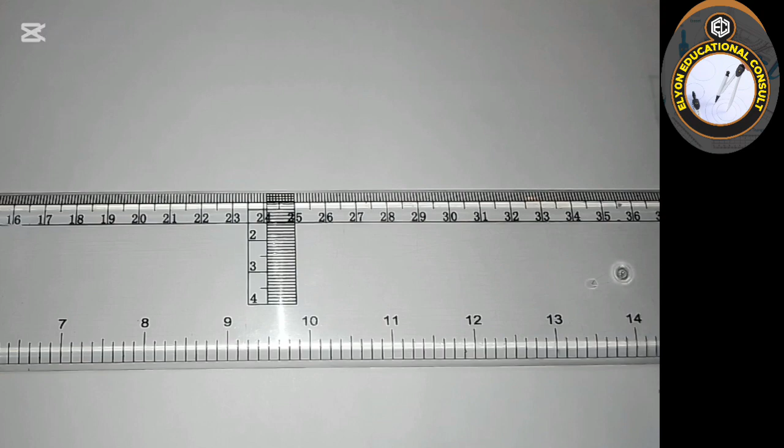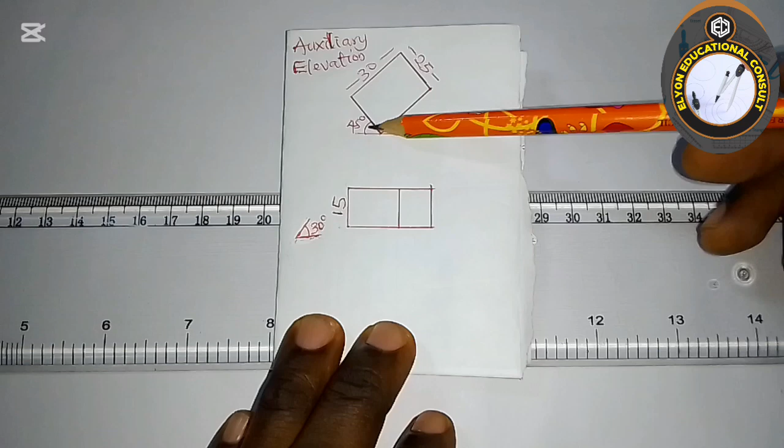In this video, we are going to be learning how to construct an auxiliary elevation of a rectangular solid block inclined at an angle. Okay, this is the rectangular solid block. You can see it is inclined at an angle. We are going to be drawing the rectangular solid block at an inclined angle of 45 degrees, and this is the plan.

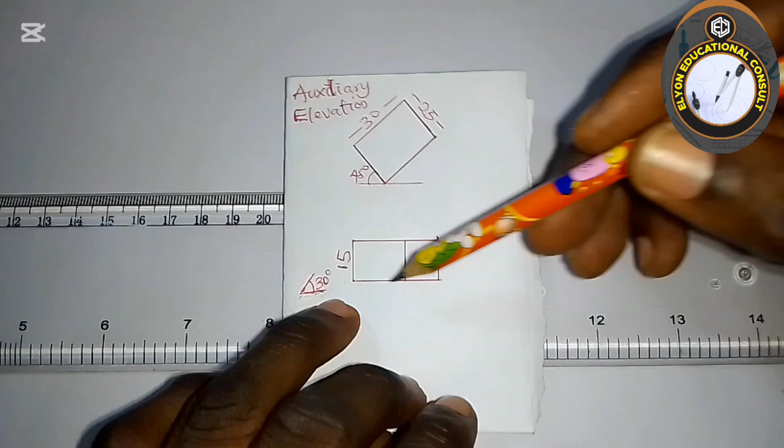You can see the angle of projection placed here. This alone tells us that we are to draw the auxiliary elevation, because we are going to be projecting from each of the edges of the plan. The first thing we have to deal with is drawing the given view, which is very easy to draw. So I will start straight away: I will draw the elevation, then I can project down. So this is what I'm going to do now.

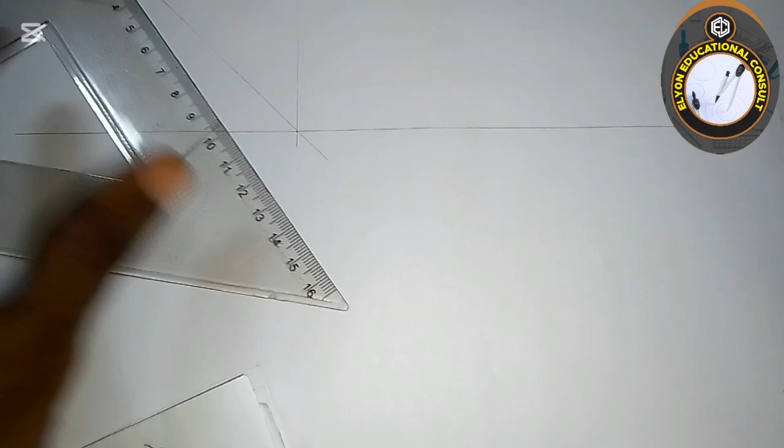From here, now I will draw this. Then I will use my 45 degree set square at any point of choice. If I use this point, or better still, I can draw a small perpendicular line. From that point, just draw the perpendicular up that way, then we project at 45 degrees this way. I'm using the inner side of my set square as my reference point. Then come this to the other side this way.

We have this. I will take the length here. We are given it to be 25, 2.5 on the centimeter rule. Then we have this. Next thing, let me draw out this place first. We are given this side to be 30.

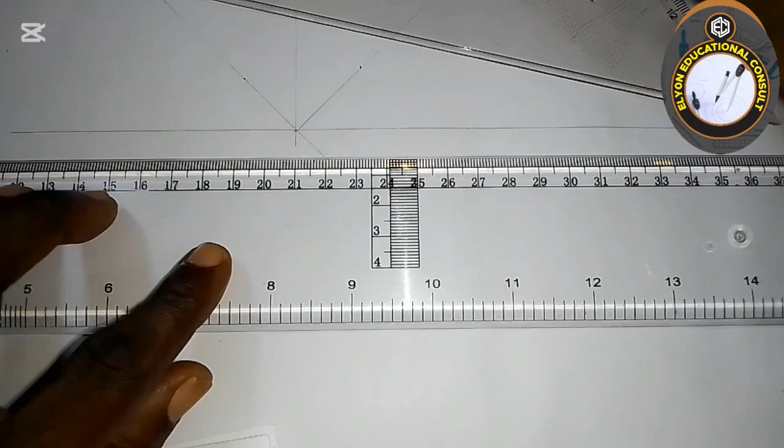Alright, then we can have this side drawn out. This side too is 45, so adjust to this part. We have here, then this other part here. So we have this. Okay, then we have to draw the plan now.

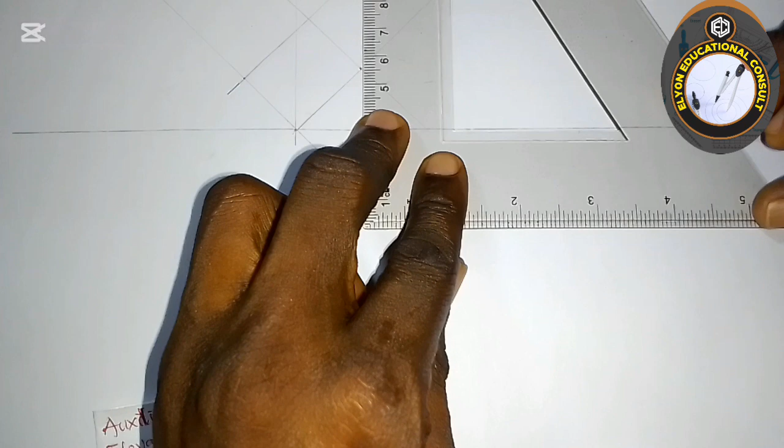Then from the edges, project lines down, come this way, just project the line down. Project this line down, come to the last one here, like this. There's an edge here, there's an edge here. Shift it to it, move it to it, then we can project this line.

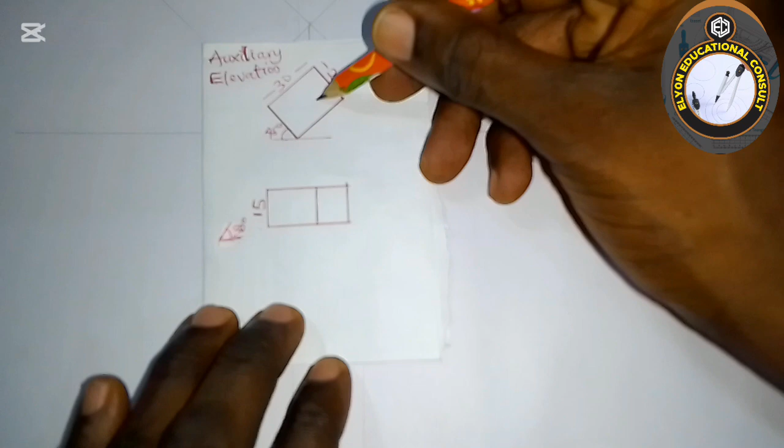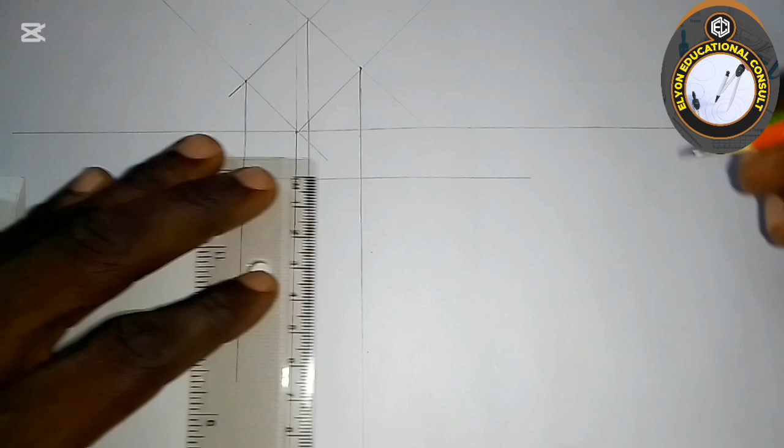Then I'll use my ruler, drop the line further this way. Then have a considerable amount of space to separate the elevation from the plan. Then I can pick this, starting from here, and we are told that the length is 15. That's 15 at this other part as well. 15, then connect them together this way.

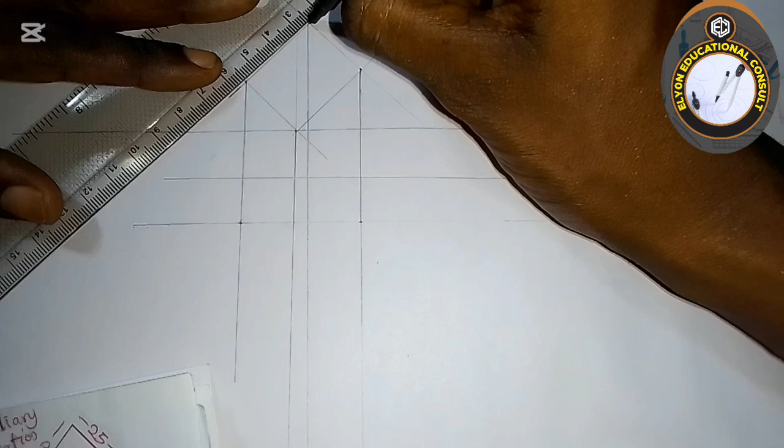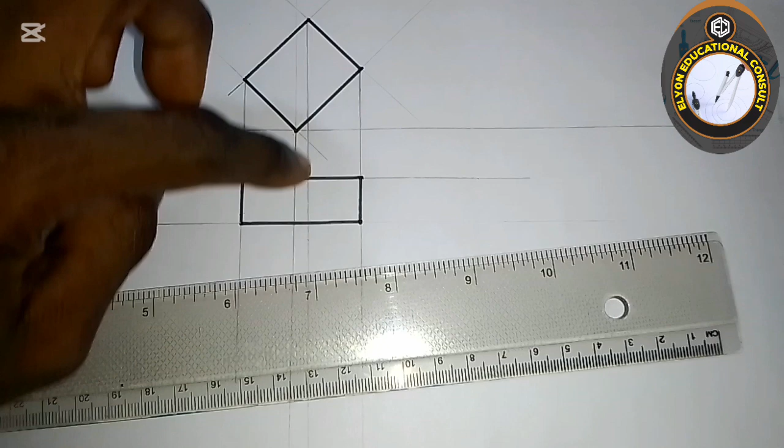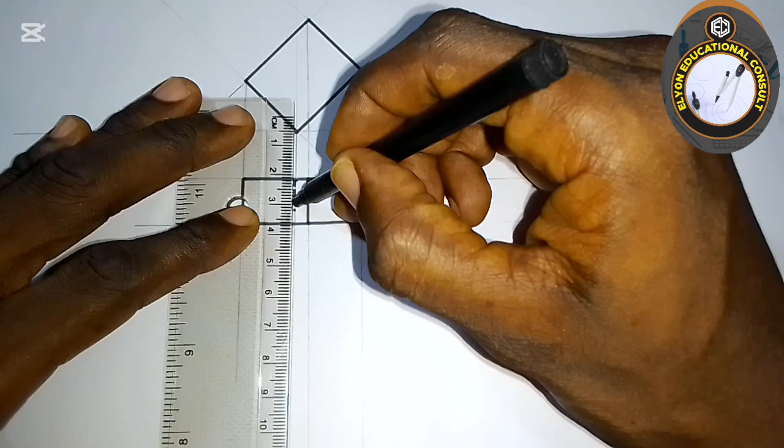All right, so looking at this now, let us draw the outline for the given view before we start solving the problem. You have this, you have this. For the plan now, you have this, you have this. Now looking from the top, we'll see this part here, so I will thicken this line. From the part here, you can't see this, so we use a broken line here. So this completes the plan for the given question.

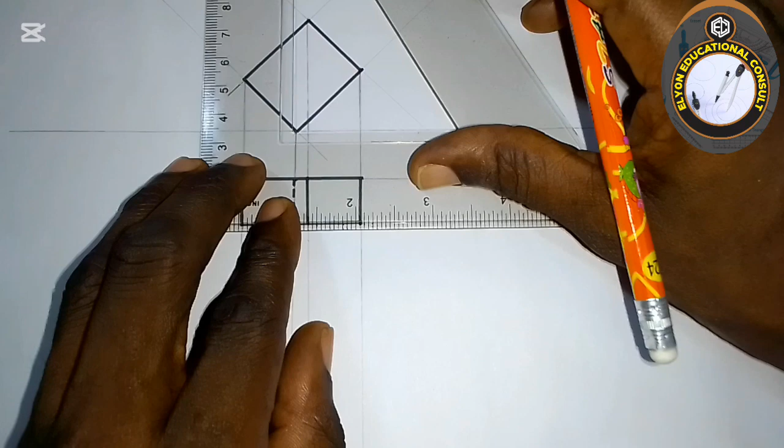When you see a question like this, it's quite different from some other ones that we've been taking. We look for the best way we can easily remove complexity and make the auxiliary view of the drawing. The first thing I will be doing here, let's take the levels. From here, draw a side line to the elevation this way.

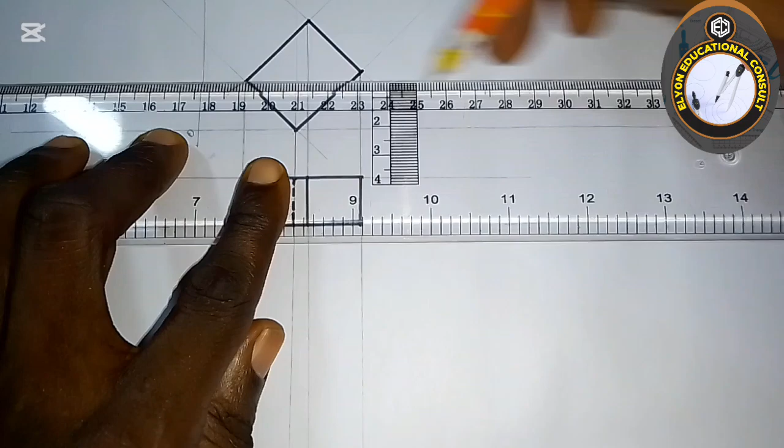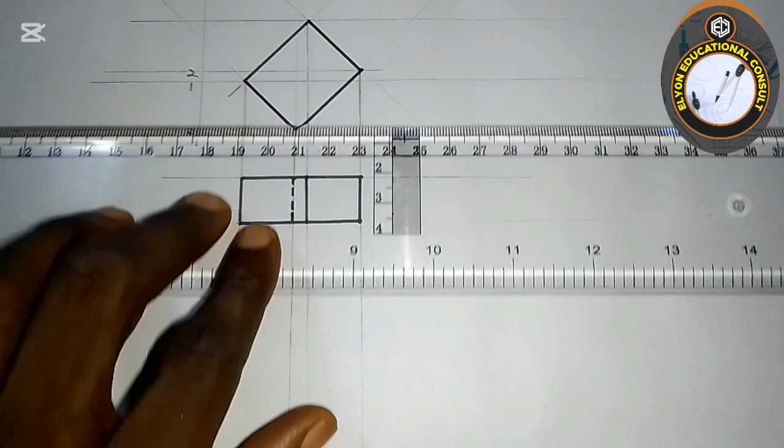So if I call this point here 0, then from here move your T-square to it, you have this. So this is my level 1, then go to the other level here, move to it. So this is level 2. Then come to the top. I hope you can see this. So we have this as level 3.

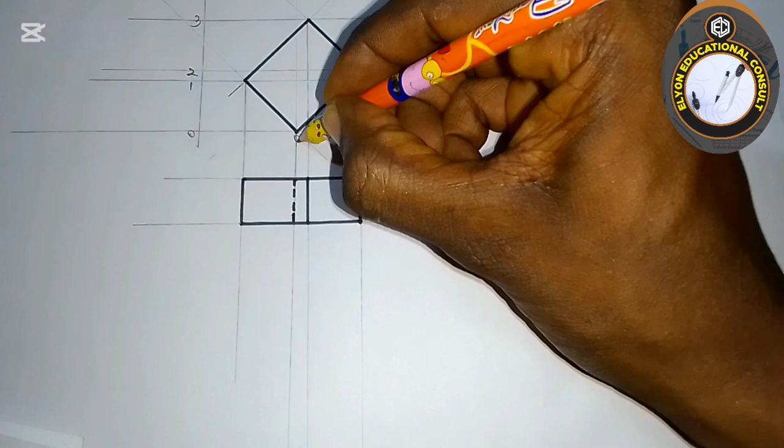Now I transfer these numbers onto the edges of this elevation, so here should give me 0. Here is my 1. Here is 3, and here is 2. I hope this is clear.

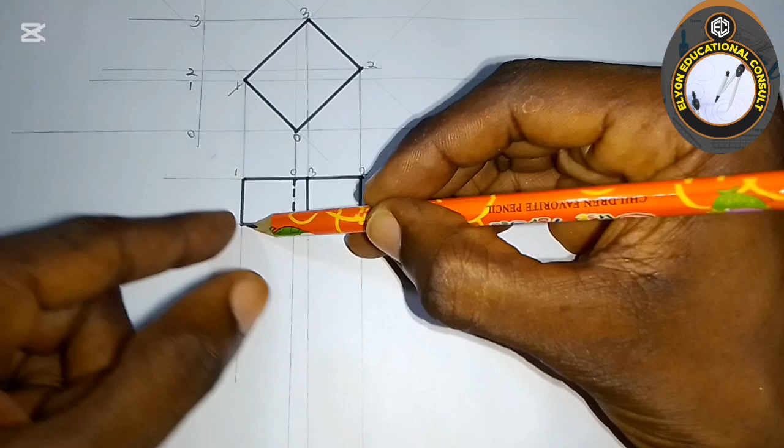So we transfer the same numbering to the plan. So here should give me 1, here should give me 0, then here 3, here 2. Okay, at the other side, the bottom of the plan, here we have 1, here 0, here 3, and here 2. You can actually use any convenient letters or numbers of your choice. All you need to know is how to apply the principle, which is very vital.

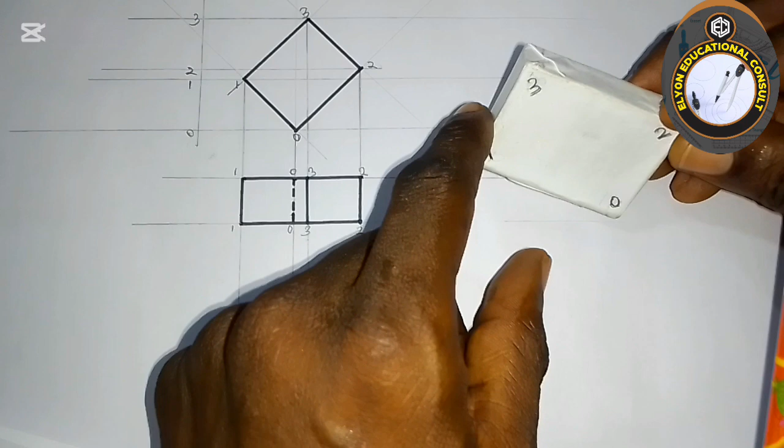Okay, this is more or less like what you want to draw now. I hope you can see this. I have this like a rectangular solid block that is tilted this way, like this. So numbering the side now, this is my 0, as you can see there. This is 1, this is 2, and this is 3, the top part.

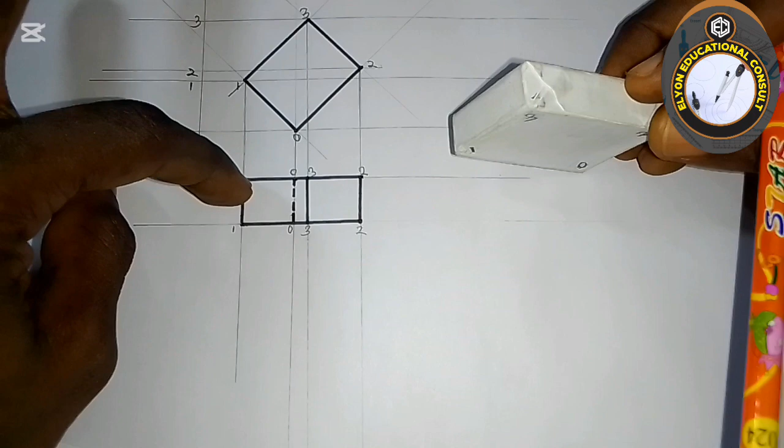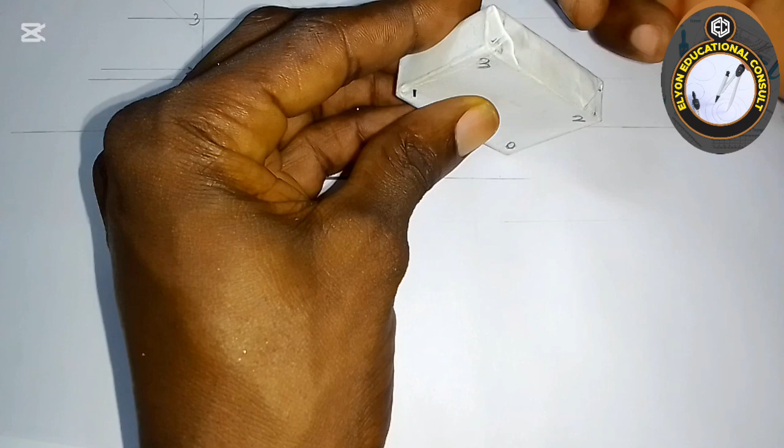Okay, now this is our plan. The plan, when you are viewing from the top, the whole of this, then this part, the whole of this part, and the edges. So this rectangular block now has some other parts behind that cannot be seen, which we are going to be representing on the auxiliary plane. One good thing about auxiliary drawing is that it helps us to show those parts that ordinarily we wouldn't have shown when we are drawing orthographic or isometric drawing.

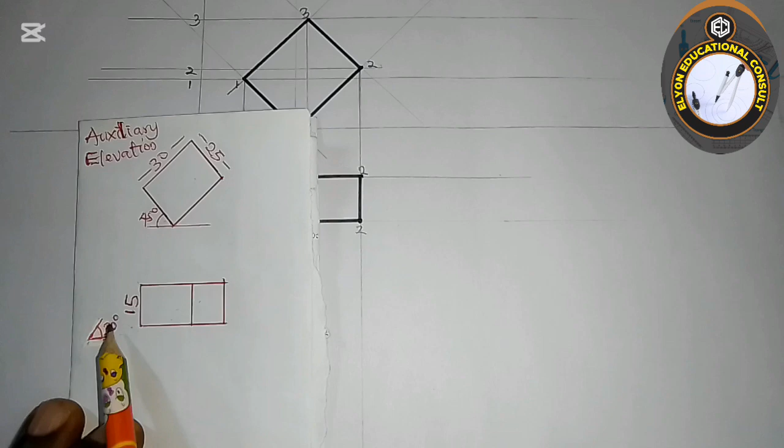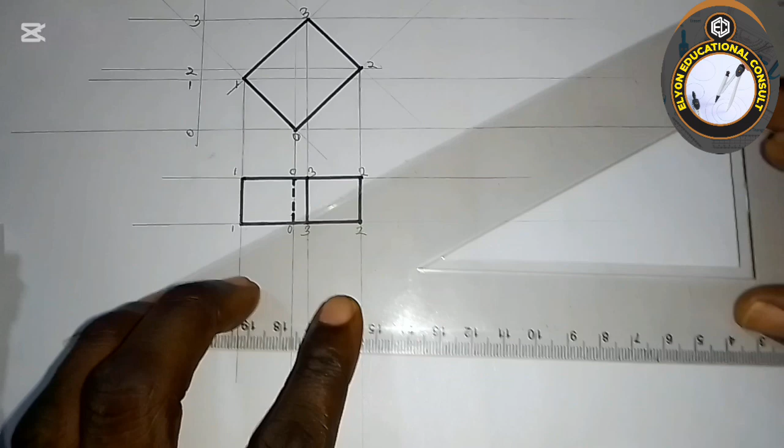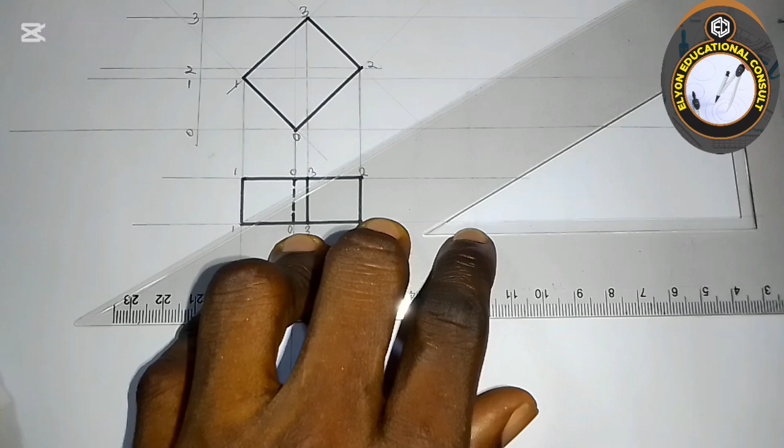Okay, so now to this question, we are told to project at angle 30 degrees. So I'm going to be projecting from the edges of the plan at 30-degree angle. So I'm going to place my set square this way, taking it to each of the edges. I'm making use of this line here as my reference. Okay, so move it, start with this one here. You have to count to ensure that you are drawing everything, so it should be thin line.

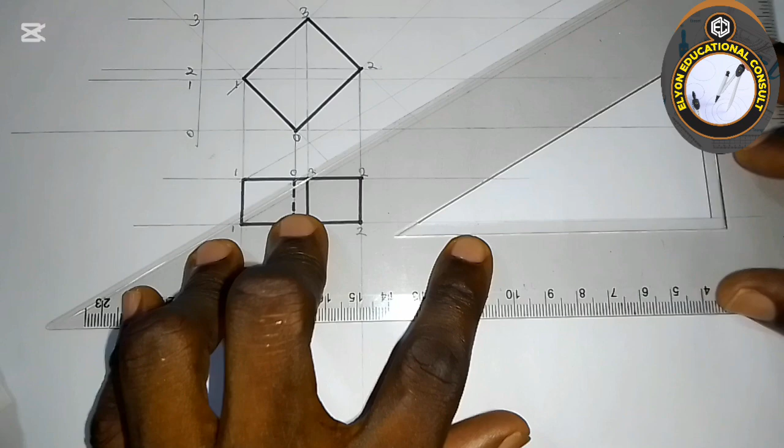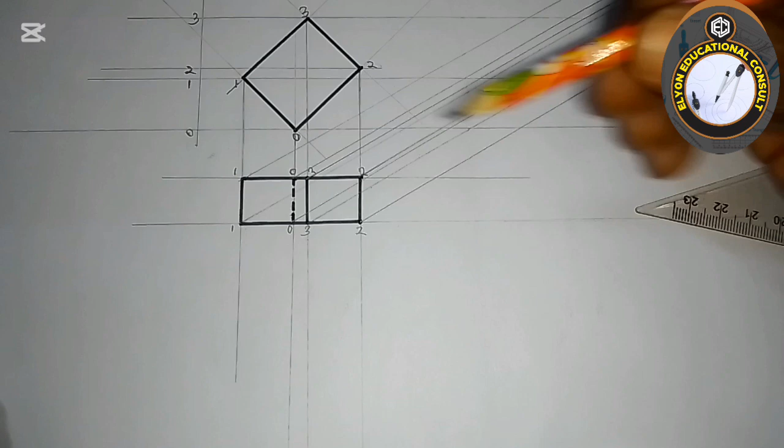Move again, like this. So you have to count the edges. When I'm done, I'm going to count it to be sure I'm not omitting anyone. Then I have to be checking. Okay, I think I've drawn everything, but let me confirm. Okay, I've not drawn for these three. Okay, let's count. It has to be 8. 1, 2, 3, 4, 5, 6, 7, 8. I think we are fine.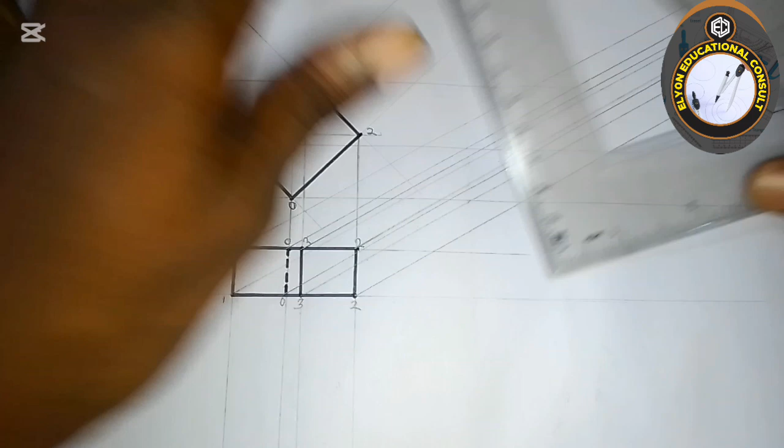Okay, so the next thing I'm going to do now, I'm going to be drawing a perpendicular line which will form my XX line. You know what perpendicular line means? At 90-degree to this line here. So pick it like this. So I'm going to draw this. Okay, so this is my XX line.

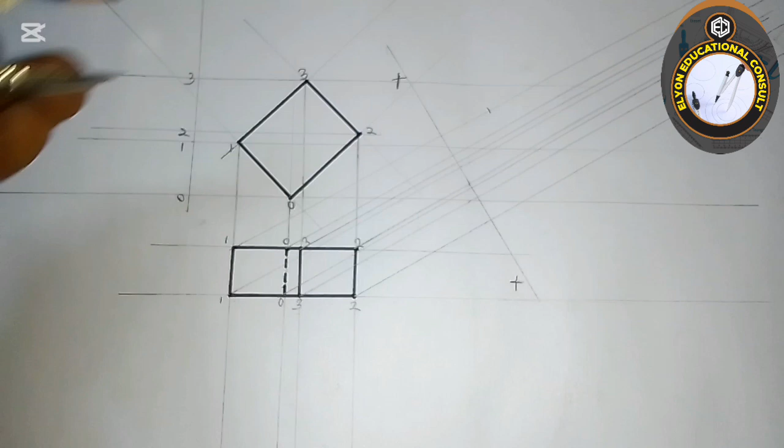Okay, now the next thing I'm going to do, I'm going to transfer these levels here. I'll start with 0 to 1, like this. Come here, transfer here. Then 0 to 2, like this. Come here, transfer here. Then 0 to 3, like this. Come here, transfer here. So when I number it, then 1, this is 2, this is 3.

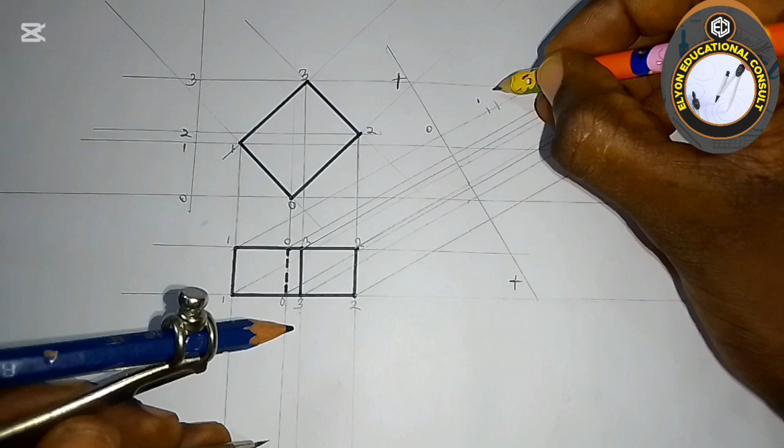So this XX line, I will transfer the line to each of these. That is very easy to do. You can do that in two ways. One, you can just take the perpendicular line just like you took for this, or you place your set square with your ruler and just slide to get to the point of the line. So I'm going to use this, at 90 degrees.

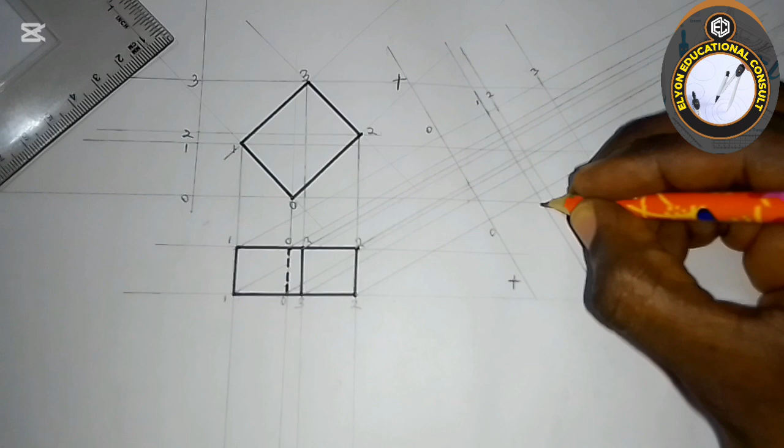So you have this. Okay, then to 2, take it down to 2. You have this. Then to 3, the last one. You have this. Okay, so I can number this down as 0, 1, 2, and 3. Okay, I hope this is clear.

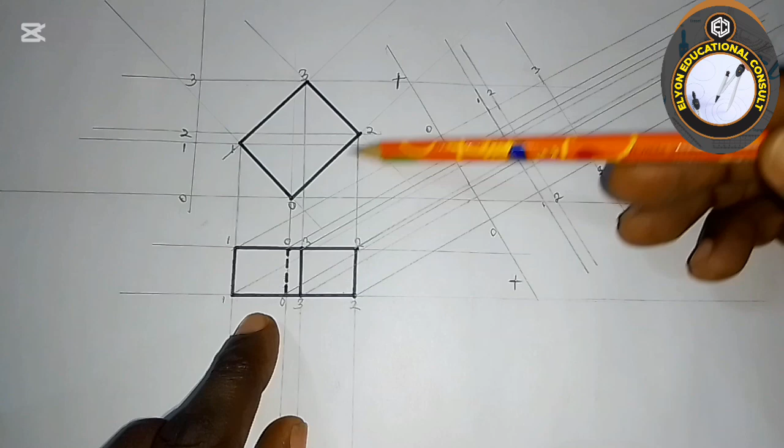So now this is the auxiliary plane. So I'm going to be transferring this now to this, making use of the projection, and you will see the reason why we label the edges. Okay, for convenience, so that it will be very easy for us to quickly get it. Okay, now let's take a look at it.

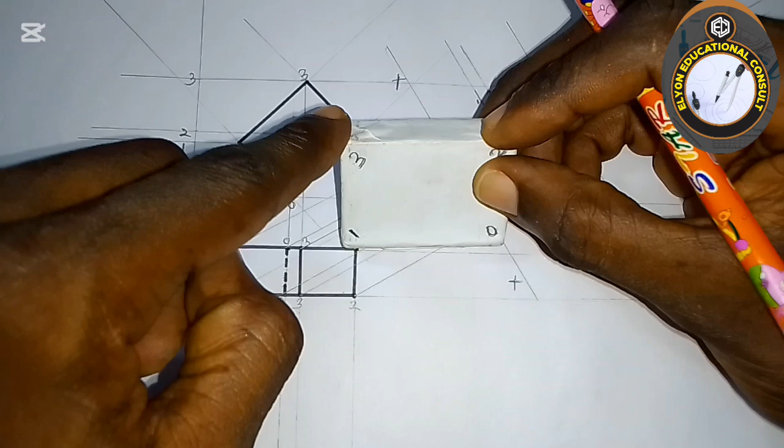Let me start with this rectangular block. Okay, it has both the length and the breadth, this length and this breadth. So I can start with any one first. I can take the length first, then take the breadth, or you call it the height. Okay, anyone. So let's take the length first, this side.

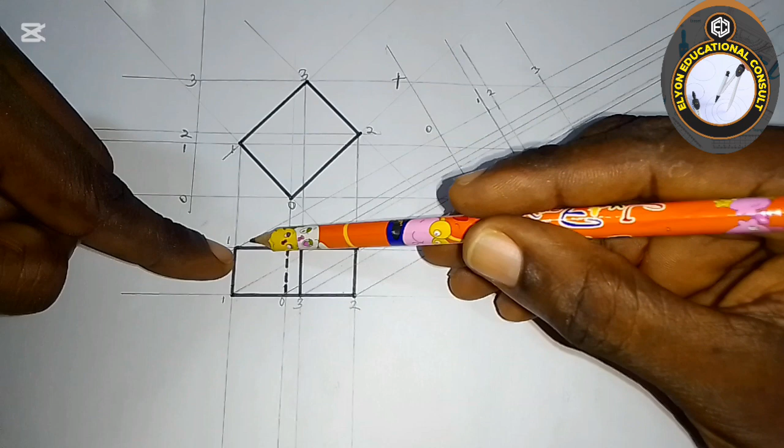Okay, now if I'm taking this side, you will see that for this one, coming this way, meeting 1 here, going like this. So whenever I get to 1 here, I will stop. So this is my 1. Take note of that. Okay, then look at 0 now. 0 coming here, then go like that. Whenever I get to 0, I will stop.

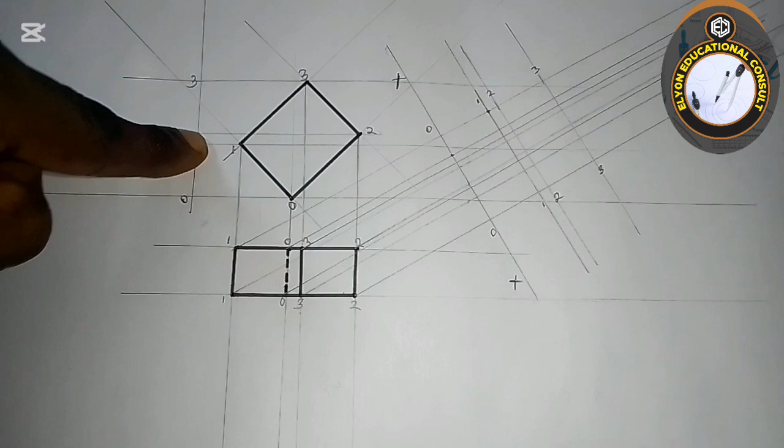Okay, now look at this place. What happened here? 0 and 1 are joined, 0 is connected to 1. So let me just connect it straight away as I'm getting the point. Okay, I will join 0 to 1 like that. Okay, then go to the next one.

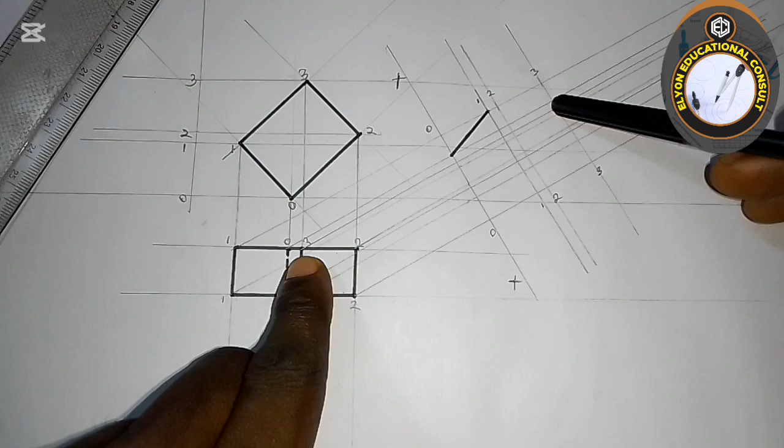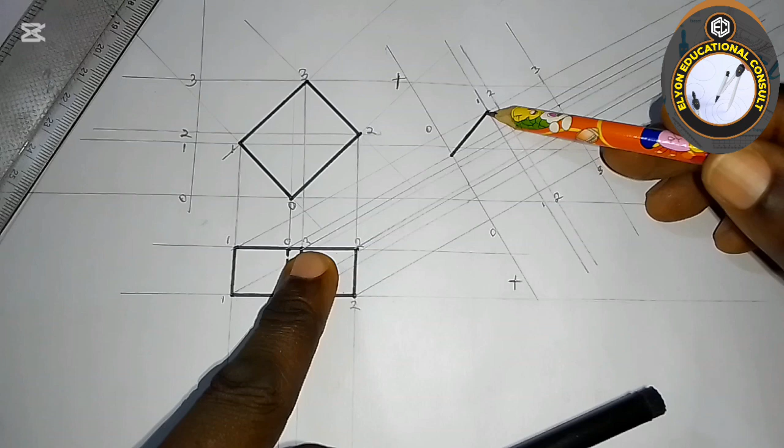Now when we get to 3, follow the line, this is point 3. Okay, and what happened from 3? You will see that this 3 is also connected to 1, that is this 1 here. Just like 1 and 0 are connected, 1 and 3 are also connected. I hope you get that.

So I'm going to join these together. This is my 3. Okay, so I'm going to connect that. So I'll connect that. Okay, I hope that is clear. I'm still working on the length.

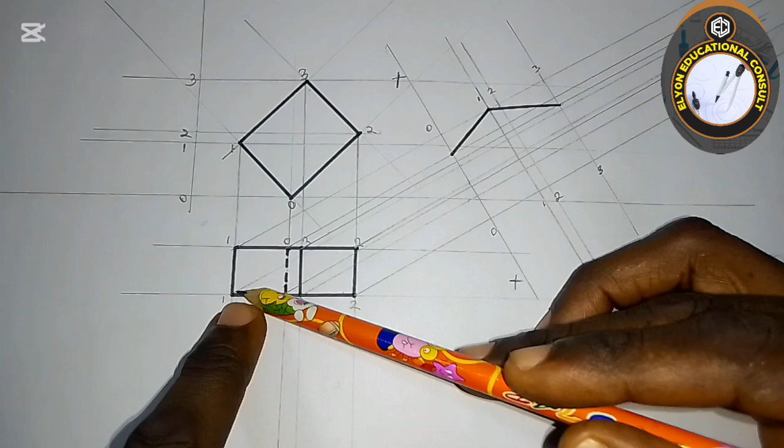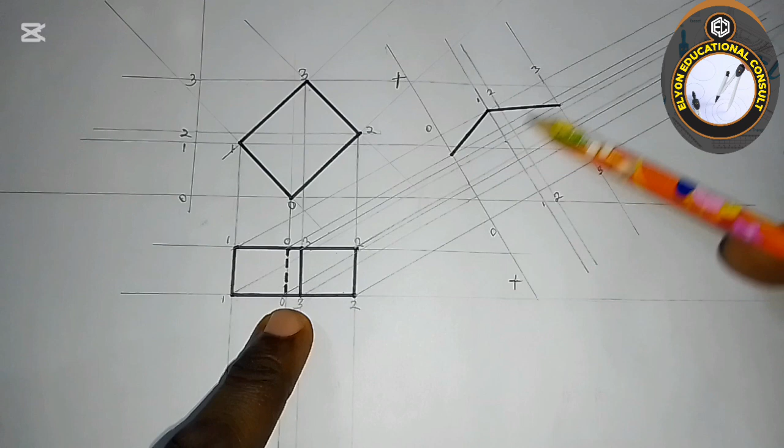If I come to this side now, this one here, if you follow it, this is 1. This one here, where it's meeting this, is connected to 0. 1 connected to 0. What I have at the top here, I'm transferring down as well. So this is 0. I'm just taking the parts that are visible for us with the length. Okay, let me check. Yes, that is the 0.

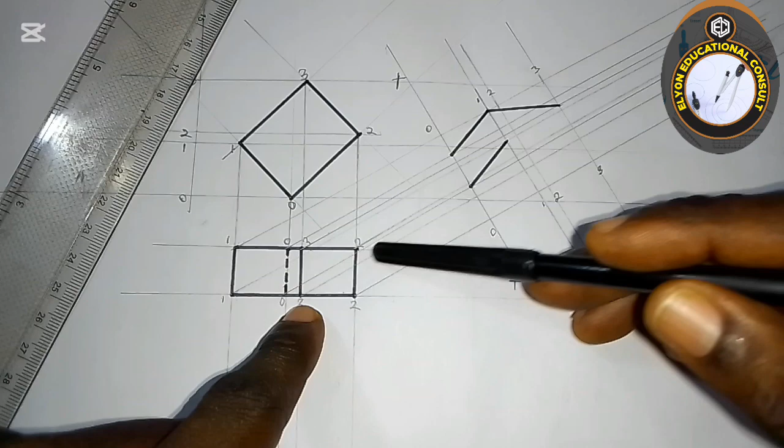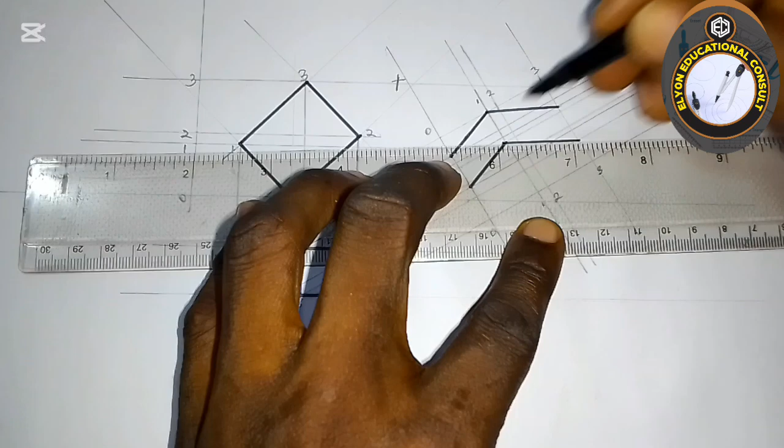The same way, like what we have there, 1 also is connected to 3. You can see 1 connected to 3. So when you go this way, where's our 3? This 3 and 3 on this plane. So this is 3. Okay, so what do we have? You take out that part, this way as well.

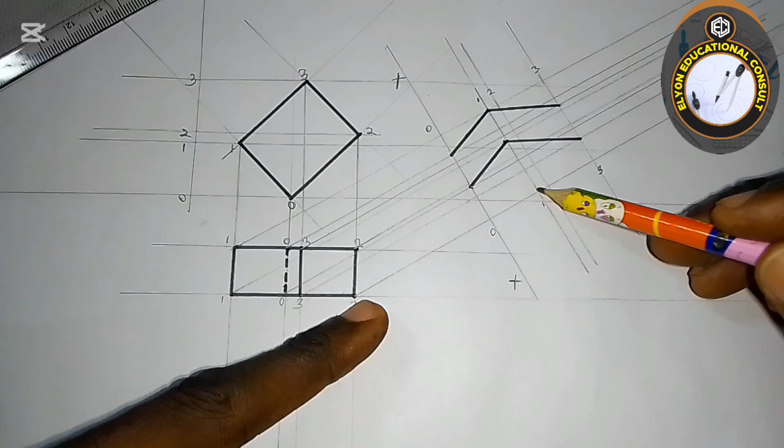Then you will see also that 0 is connected to 2. As we are walking forward, we are also taking it backwards. Now if you trace this 0, go this way, this is 0, which is connected to this 2. I hope you can see it. This is 0 here, and where's 2? This 2. Okay, 0 is connected to 2 also.

So I'll come this way. Have that. Okay, then this 2 is also connected to 3. Going back now, 2 is connected to 3. This is 3 here. So we have this.

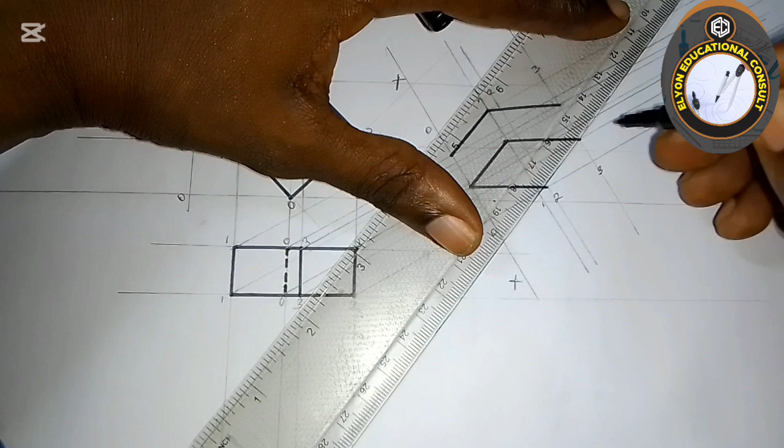Okay, I hope this is clear. Okay, just like this now, we have the bottom of this. When you have it like this, okay, you have that bottom. So this now, let's go to the length now. Let's go to the breadth now. We'll come to the hidden part later.

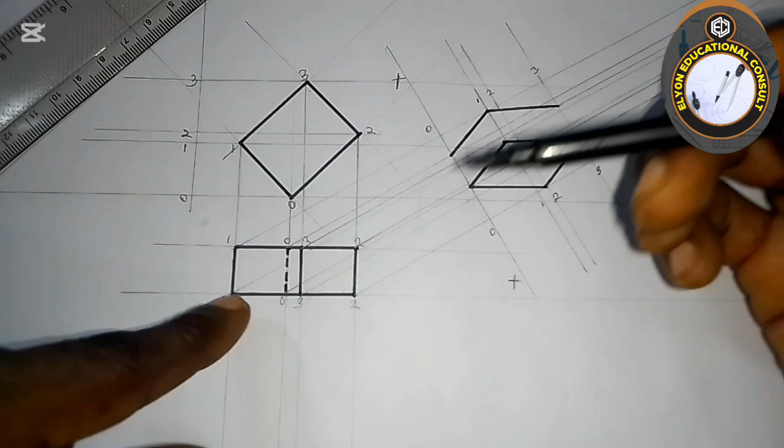Now if you look at this, 1 and 1 are connected. This one, and this one is connected to 1. This which we are going to be seeing is just like the observer standing here at this point, viewing this at a 30-degree angle, seeing this side and this side. Okay, so I will take out this.

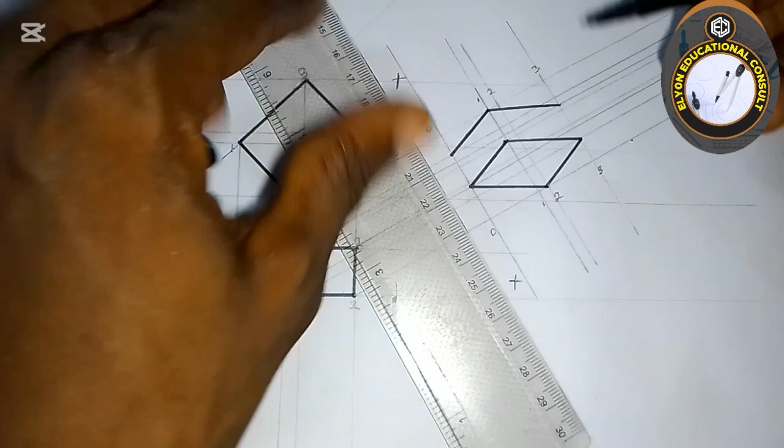Okay, take out this. So the same thing is applicable to 3 to 3. This one here now, this 3 and this 3. The height or breadth, I will take it out like this. Okay, now the same thing with 0 to 0. I will take this out. Okay, now let's go to the hidden part.

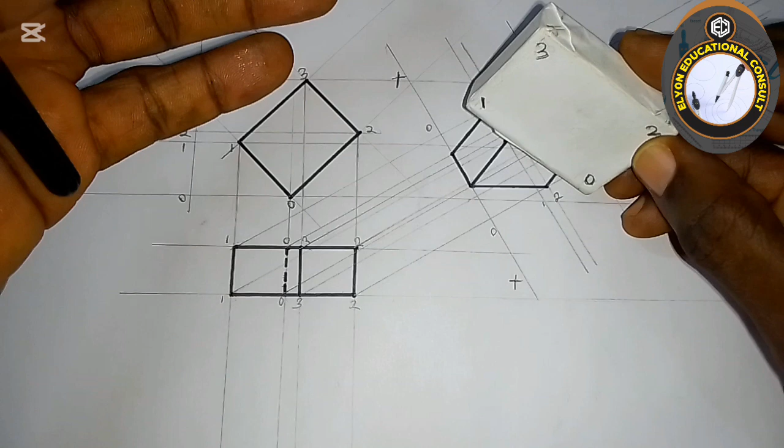I said auxiliary view or auxiliary drawing helps us to see those parts that are ordinarily invisible when we are drawing an orthographic projection. Now, if this had been a rectangular prism or transparent block, we would be seeing the back, just like I numbered the back correspondingly, but which we cannot see because it's opaque.

If it were transparent, this one here, I would still be seeing it. Okay, I will show us that as soon as we are done. Now we are going to be drawing those parts that are not visible. You can see if you are viewing from this side, we are seeing the whole of this. You can't see this part now.

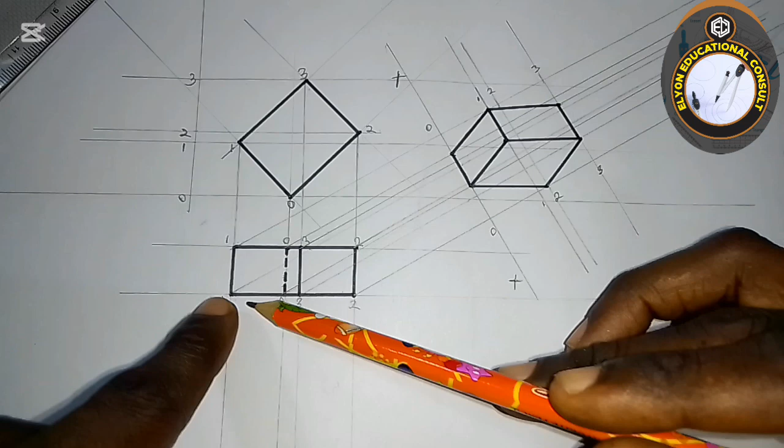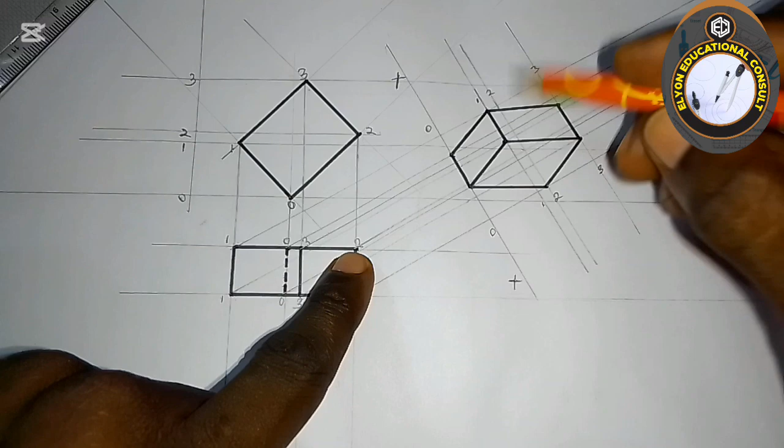So 0, trace it like that. When I get to 0, I will stop. This is my 0, and 0 is connected to 2, the length. Go this way. When I get to 2, this is 2. I hope you can see this 2 here. This is 2, on level 2. Okay, this is my 0.

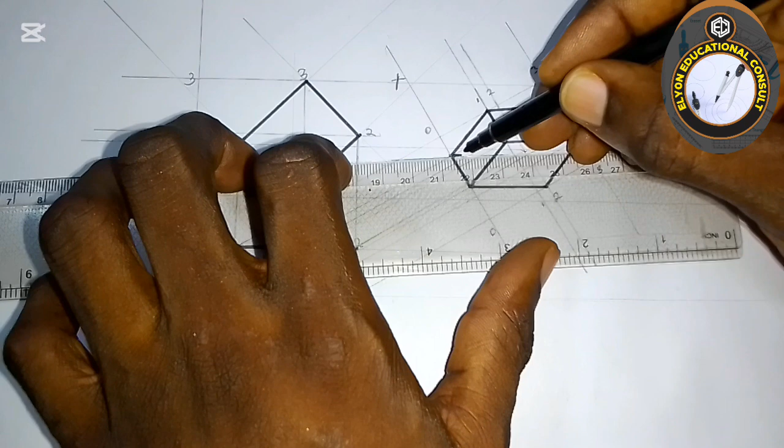So what am I going to be doing? I'm going to be using a broken line because it is at the back of the block, which is not visible. Okay, I hope you get that. Okay, now this is 2.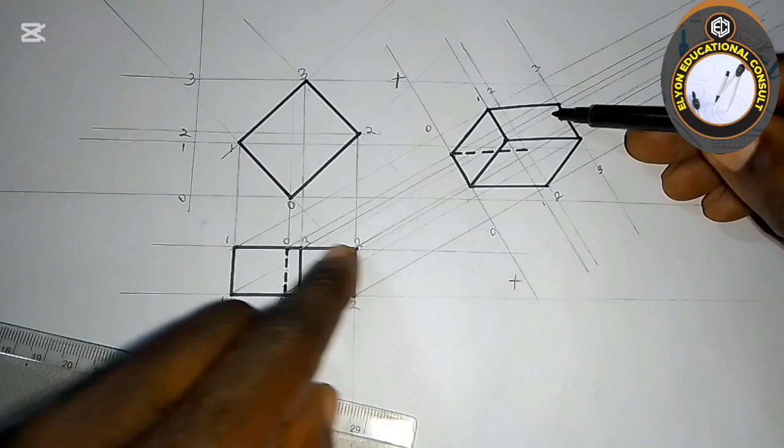This 0 to 2, and 0 to 2 is also connected to 3. That is, those at the back, 0 to 2, then 2 to 3, they are connected, which cannot be seen. The same thing is applicable. Now if you look at 2, this 2 is connected to this 3 at the back. Then I will use a broken line for that. You can see the block is getting into shape now.

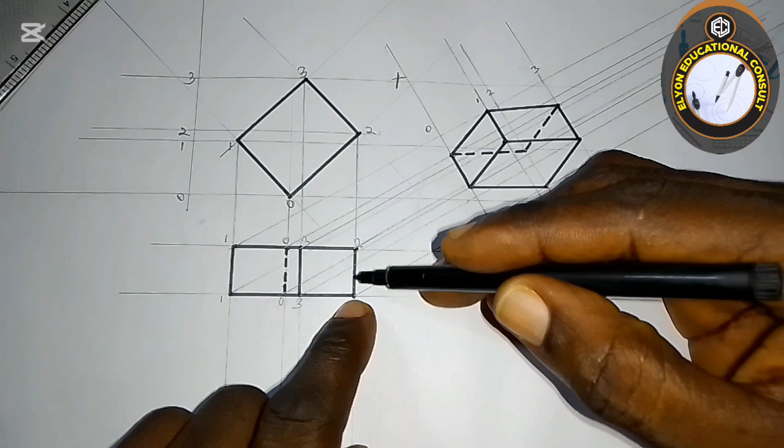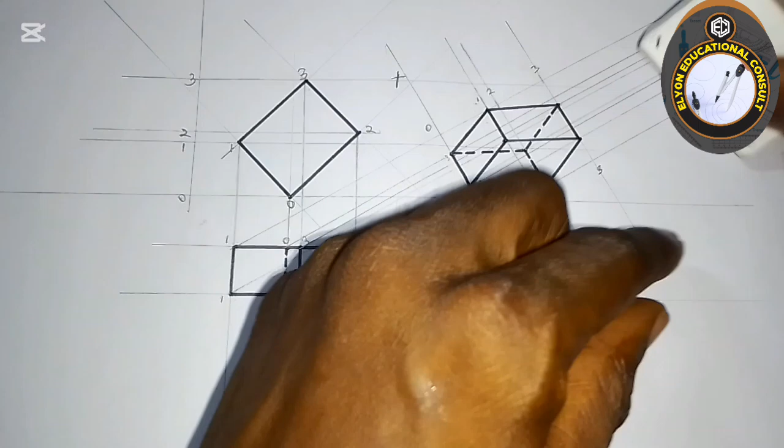Then this part here, this 2 vertically is connected to this 2 at the back. Because it's at the back, we can't see it, so we use a broken line for it. You can see this is what we are going to be arriving at when we do it like this.

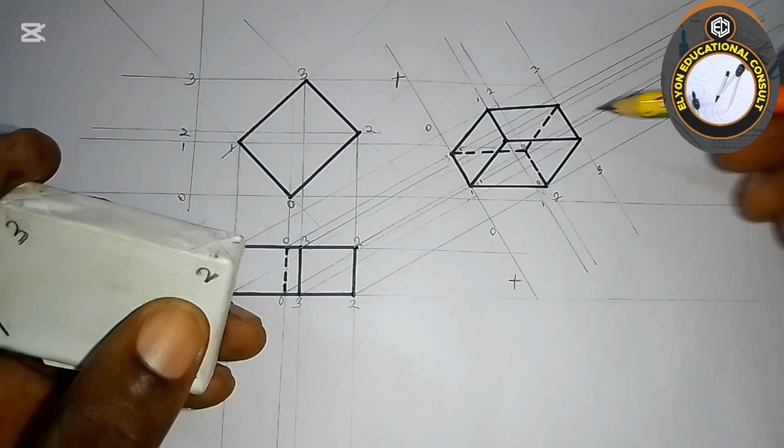Let me show you something. Now if this side is 0, it means that we have another 0 at the back, this one at the back here. If this is 1, I have another 1 at the back. If this is 2, I have another 2 at the back. And if this is my 3, I have another 3 at the back.

So you can see that those parts that are invisible, we've been able to draw them using an auxiliary projection. I hope you find this helpful.